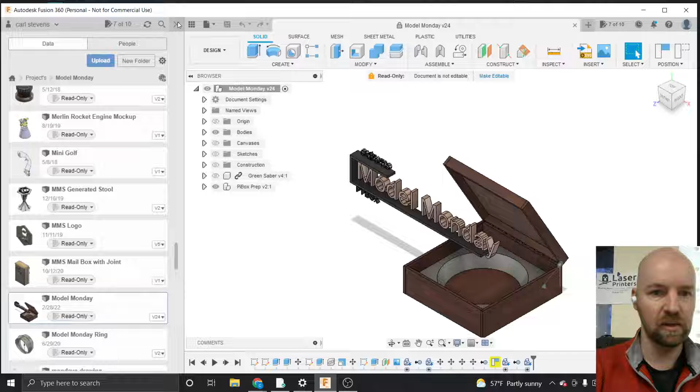All right, so our drawing environment here starts off pretty blank. When we start a blank document, there's not a whole lot to look at. We have our drawing workspace out here in the middle, and up in the top right-hand corner is our navigation cube. As I hover my mouse over that cube, you can see I can click on any object or any face that highlights blue, and we spin around to see that.

If I bring up our file that's actually got something in it, you can see I can hover over this corner, it turns blue, so I can click on that. Then I spin right around so I can see that corner. I can hover over this word 'top,' click on it, and spin around so I'm looking at the top.

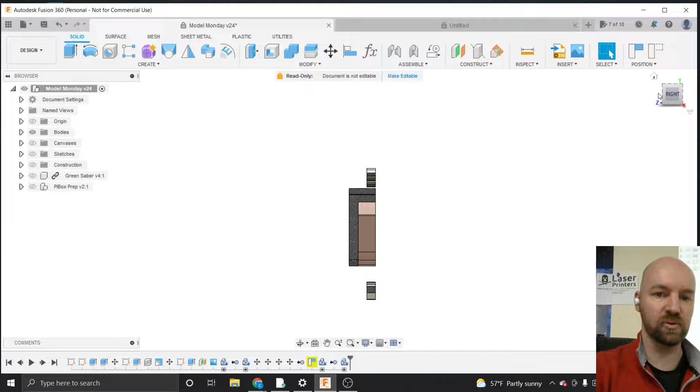If I'm looking at a side of this cube, in addition to these little corner tabs which spin us around so we're looking at the right side, or spin us around so we're looking at the front here now, I also have these rotational views. So I can rotate the view in any way that makes sense for me. I think that, Mike, correct me if I'm wrong, like 75% of getting started in Fusion is learning how to navigate around and getting used to moving around your 3D environment.

Yes. So making sure what part of the menu you're in, because some stuff that works when you're in sketching doesn't work if you click on sheet metal or something else. That's a good tip - remember where you are and what you can do where you are. Everywhere you go, there you are. You just got to remember that. Yeah, so navigating around is one of the first hurdles you got to jump over here.

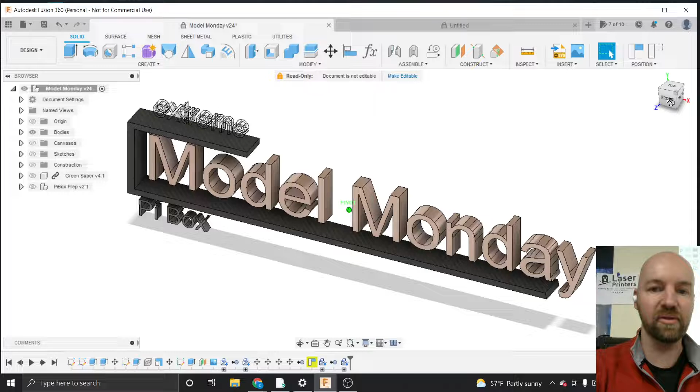In addition to this navigation cube and moving around, I also have a bunch of tools down here at the bottom. The tools down here at the bottom, I don't use a whole lot. That's because this first tool, the orbit tool, I use the navigation cube for that. The orbit tool does the same thing as the navigation cube - it lets me move around my drawing environment here.

Can I ask a question? Yeah. Why is that - that navigation cube, every time I grab it, stuff starts spinning around, and it's not very easy to get the orientation you want. Yeah, so I find if you're dragging your mouse, if you click and drag on this navigation cube, it moves your model around in a more granular way.

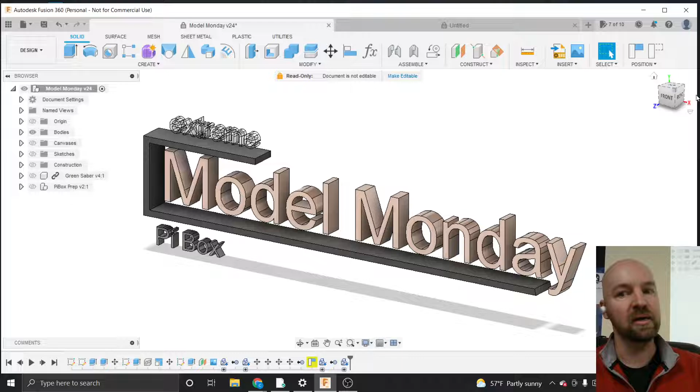That works better when you're clicking and dragging and moving your mouse toward the window. If I move my mouse outside of the Fusion 360 window, that's when weird things start happening.

So what's the difference between those little corners and edges and the front face, side face, all that? The edges and corners, I can click on anything, click and drag on anything, and it'll highlight blue and affect it all the same way. If I click on any blue object on this navigation cube, it shows me different angles of the model.

Down here at the bottom, we've also got a pan tool, and panning lets me just pan left or right, or up and down. Maybe that's kind of self-explanatory, a pan tool.

Any of the tools down here, if you grab hold of them, you have to hit the escape key to put them away. It won't let you click on anything else. If you've got that pan tool active, it won't let you do some things unless you hit escape to put the pan tool away.

There's a zoom in and out down here too. I don't use those a lot because I use the trackpad on my laptop to zoom in and out. I think you can also do this with the scroll wheel on your mouse to zoom in and out.

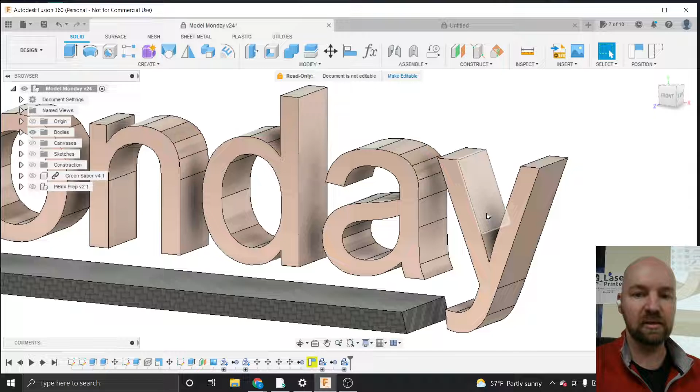A lot of what we'll end up doing when we make things three-dimensional is zoom out, zoom into another area, do some work, zoom out again and rotate our view around, then zoom into another area. Sometimes you'll see my view do that weird spinny thing, and that's just because I moved my mouse somewhere where Fusion loses it. You just have to get your bearings again, figure out where you are, and start from scratch basically.

As we start drawing things and modeling things, a couple things will happen. As we start using the tools up here at the top to create, in general we start by creating two-dimensional sketches, and then we take those two-dimensional sketches and make them three-dimensional.

But when we start making a two-dimensional sketch, we'll have a folder that pops up in our browser. The browser is often on the top or left-hand side of your screen. Right now this blank document just has an origin in it, but once we start making two-dimensional objects, we'll get a sketches folder, and in that folder will be all the two-dimensional sketches that make up this file.

I encourage people to be better at this than I am, and we'll talk about it as we draw. Sketch 1, sketch 2, 3, and 4 are terrible names for sketches, and you shouldn't name your sketches that. These are just the default names Fusion gives you, but you should get in the habit of naming your sketches.

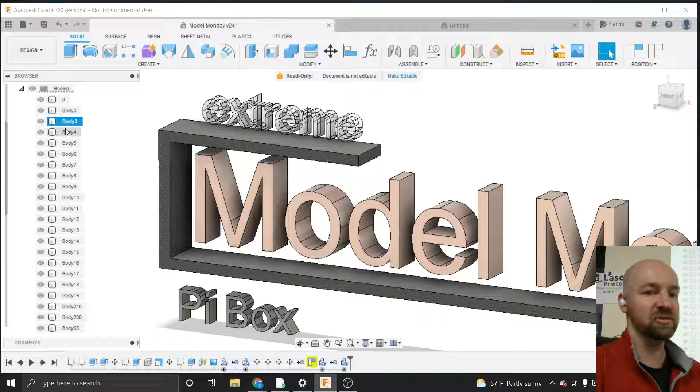As we continue, as we make those two-dimensional sketches into three-dimensional shapes, we'll have a bodies folder pop up, and we'll have all our bodies that we'll once again be diligent about naming. See, I named this one Body 4, and that was a great name because it's the Y—no, it's because I did not name that body. Again, we'll be better at this in practice as we start making real life things.

The last thing I'll point out before we jump in and start making sketches: in addition to the browser populating with folders, sketches, and bodies, our timeline at the bottom of the screen will also fill up with icons. Right now this is just a blank area down here for you guys and girls.

The icons here represent the steps that I took in order to get to where I'm at.

Fusion 360 is a parametric design software. That means at any point you can go back in time using the timeline at the bottom and change something you did in a sketch or an extrusion. Then when you come into the present, it will automatically update, in theory. Sometimes it works better in theory than in practice, but there are ways we can help that work better. So let's get started.

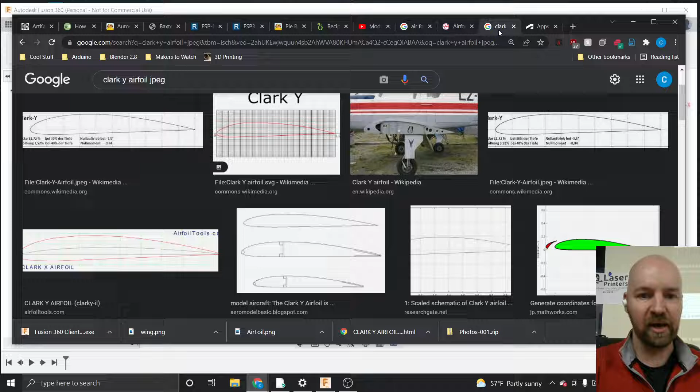In order to sketch an airfoil, there are two ways we can go about sketching in general. The first way is to find a drawing that has some sort of dimensions on it. Now these dimensions are just vague dimensions, and we're going to enter in dimensions in their absence - or to measure a thing you have in front of you and make your sketch from those dimensions. So what do I mean by that? Let's make a sketch.

From the Create menu here, we're going to go ahead and choose the Create Sketch option - it's the second option from the top there. If we choose this Create Sketch option, it first wants us to pick a drawing surface to draw on.

Go ahead. What units are you working in, and what's your home view?

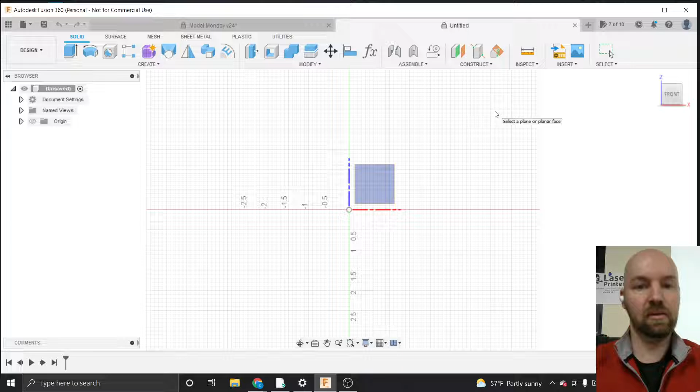That is a fine question. In this class in general, I tend to draw in freedom units - otherwise known as inches, or the imperial system. So if your head works in the metric system, I believe that international standards exist, but I will not acknowledge them during the hours between 6 and 8.

So if you want to change your units, you just have to spin down your document settings window here, or the little triangle. Then if I hover over units, this little icon appears next to it. I can click on that icon, and then you can change it to freedom units, which I have here. That's my default - I have this little checkbox checked. So if you want to set that as your default, you can feel free to do that as well.

Otherwise, like I said, I know that there's something called the metric system that everybody else uses, and they think they're so cool because they do the same measurement as the rest of the world. But this is America, Jack.

If your home view is Z-axis up - it is, and honestly I don't change that too much. I don't find myself clicking on this home icon very often. If I right click on it, I think I can say 'go home.' But the precise orientation of this cube doesn't really matter a whole lot. When you talk about machining stuff, then your orientation matters a lot, but that's a whole different coordinate system that you set up yourself.

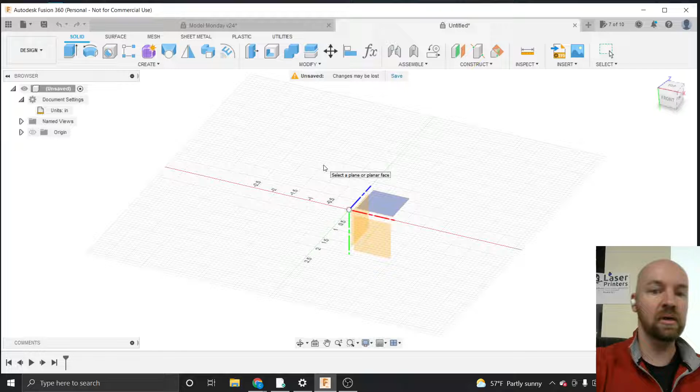Fusion gives us these drawing surfaces right off the bat to start with. You can imagine these as being walls and a ceiling or a floor. I can pick any one of these drawing surfaces to draw on—it doesn't really matter a whole lot. I tend to pick the front surface as a rule of thumb. For me, that's the surface between the X and Y axis, the red and green axis. But again, it doesn't matter much which drawing surface you choose to start with.

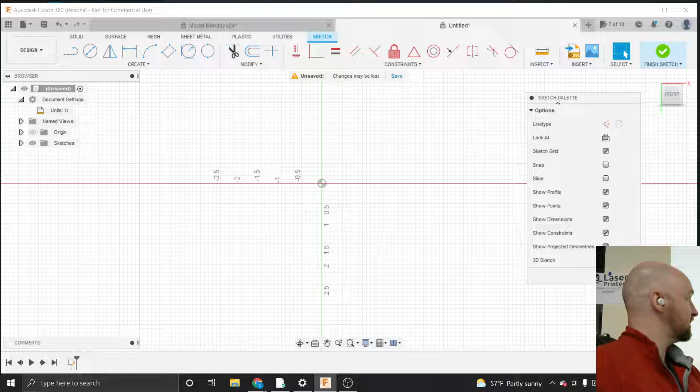Once I click and place that icon, a bunch of things change here. Because we're creating a sketch, we're what's known as editing a sketch, and there are a couple of flags that show you're editing a sketch. We've got our sketch palette window here, and all of our tools across the top have changed. Where previously we had three-dimensional tools, we now have two-dimensional sketching tools for creating a sketch. We've also got our finish sketch icon in the top right-hand corner. So now we can start using some of the sketch tools.

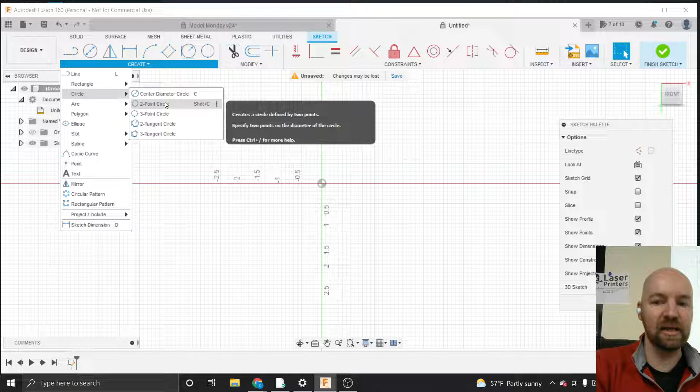From the create menu, let's grab the 2-point circle option—go down to circle, then 2-point circle. One thing I like about Fusion, and what makes it beginner friendly, is that it gives you tool tips for almost everything. If I'm ever curious or don't know what to do, I can just stop moving my mouse and Fusion will tell me. A lot of these tool tips show pictures and tell you not only what the tool does, but how to use it. This one creates a circle defined by 2 points, and tells me the way to use it is to specify 2 points on the diameter of the circle.

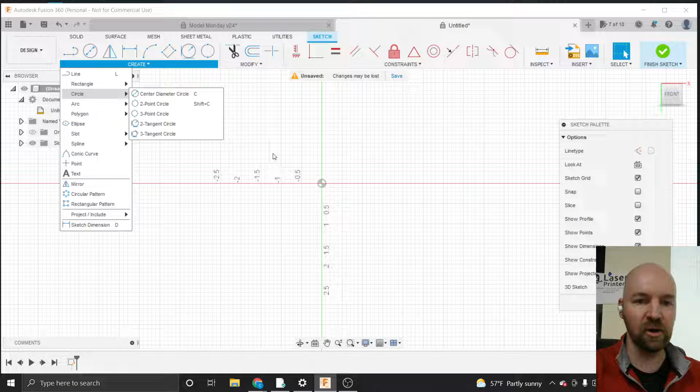If I click to choose the 2-point circle option and then stop moving my mouse, Fusion pops up with a little tooltip—like Clippy from the old days of Microsoft, the little paper clip. It tells me to place the first point on the diameter. So if I click right here at the origin, at the middle of my drawing plane, I'll place that right there. Now it's not a click and drag, it's a click and move—I've clicked, and now I'm just going to move my mouse out, and I could click to place the next point of this circle.

Whenever I encourage people, the rule of thumb is: when you see numbers, let go of your mouse and embrace those numbers. It's Pi Day, so we're embracing numbers of all kinds today. Let's just make this a 1-inch circle. I was going to say we should make it 3.14 inches, but that wouldn't be a very good idea for this particular sketch—and it's a circle, so it's already pi, right? We don't need to add pi to the number here, it's already pi.

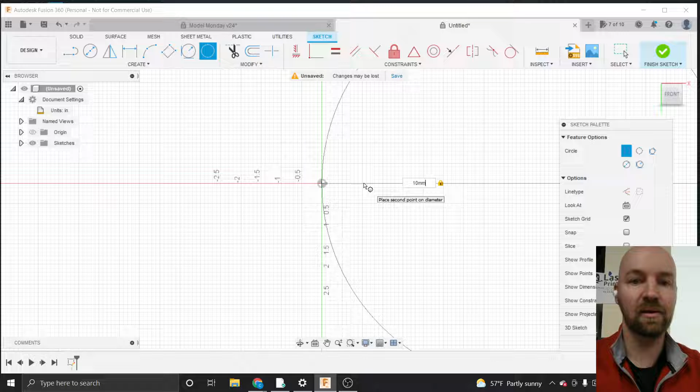If I just make that 10 millimeters—even though our units right now are inches, 1 inch is about 2.54 centimeters, so you can just type in another unit there if you feel like it and draw with whatever units you want, even though our units are set to inches. I'm just going to stick with 1, and then place the second point of my circle. Actually, when I type in a distance of 1 inch, I can just hit enter. Now I've got a nice 1-inch diameter circle.

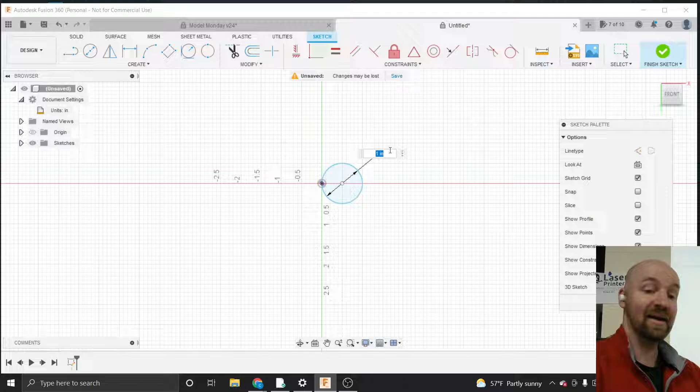If I wanted to, I could move that measurement around—sometimes you'll have to move these measurements so they're more visible, but outside the circle is going to be fine. The other thing is, if I wanted to, I could double click and change this measurement—I could double click and change it to 2 if I wanted to. I don't need to, because 1 inch is just fine, but just know you can change those measurements by double clicking on them and then change it to whatever you want.

Let's make another part of the sketch. I'd like to make a line that goes from this circle backwards, and I'd like to make that line tangent to this circle. So how will we do that?

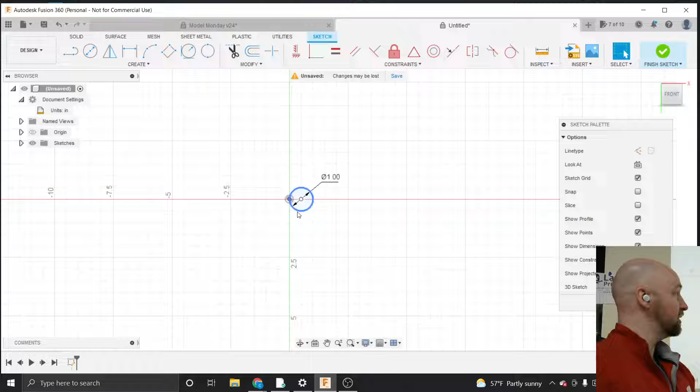Let's go ahead and find the line tool first. If I click on the Create menu, the very top option is Line. Now if I stop moving my mouse, it'll tell me I'm supposed to place the first point in my line. I'm going to zoom in here so this circle is a little bit bigger.

I'm purposefully going to place this line not tangent to this circle because I'm going to make it tangent later, and I suppose I could show you how to do it both ways. So I'm going to take this line and draw it out. Six inches seems like a good distance to me. And I'm going to hit enter here.

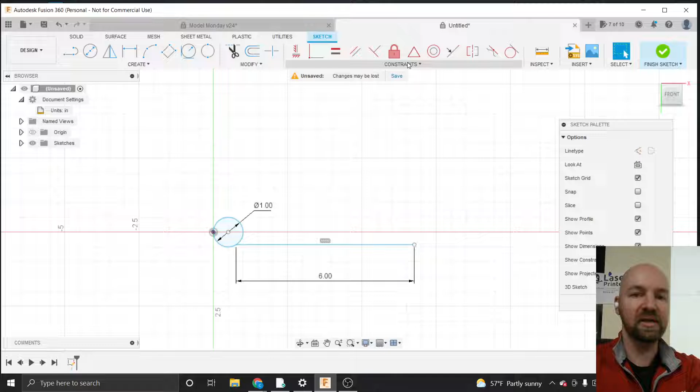Now my line is definitely not tangent to my circle, but we've got a whole menu dedicated to constraints. These constraints are ways to force your sketch into certain rules. You can apply rules after the fact, let's say. So for example, there is a constraint called the tangent constraint.

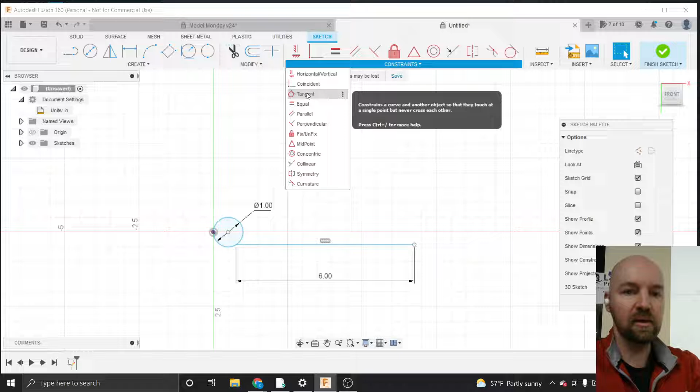If I choose this tangent constraint option here, and I pick the circle that I want something to be tangent to, and then click on the line, it's going to go ahead and make that tangent for me. So it's going to add this tangent constraint right here. That little icon is my tangent constraint icon, and now those things are always going to be tangent to each other.

Let's make another kind of line here. So from the Create menu, go ahead. Mine jumped up off the axis. Is there a way to move it back down?

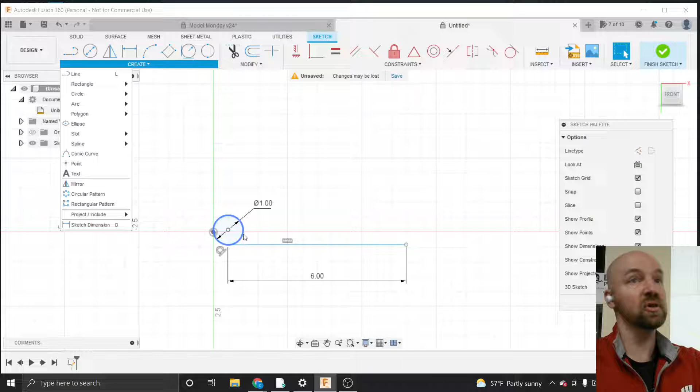There is. Right now our sketch is not fully constrained, so things can move around a little bit, and if we wanted to we could fix that. I think we can fully constrain this sketch as is. So the sketch is constrained in dimension right now, but it's not really constrained in space, so it can move around in space a little bit here.

I bet if we add a line, so if we click on the Create menu and we add a line that goes from the center of the circle here to our origin, at whatever angle that's at will be fine.

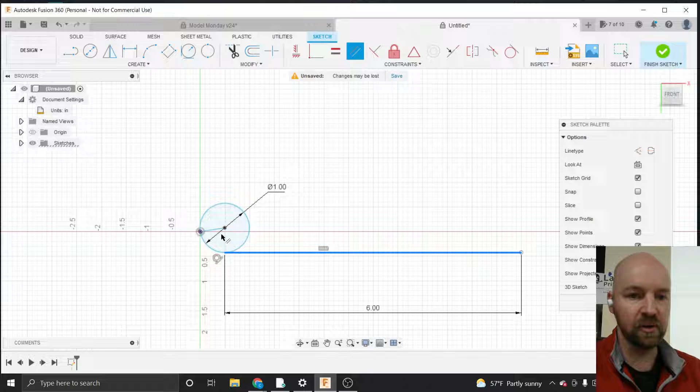And now if I add to this line a constraint that forces it to be either horizontal or vertical, or the other option would be to do a parallel constraint, I bet that would work as well if we choose this parallel constraint. I'm going to pick on this line that I made down here, and I choose that line there. There we go. Now all of our lines turn black, which means our sketch is fully constrained.

So now if we add more constraints here, which we're going to do, everything is kind of locked in position. It's not going to shift around in X or Y.

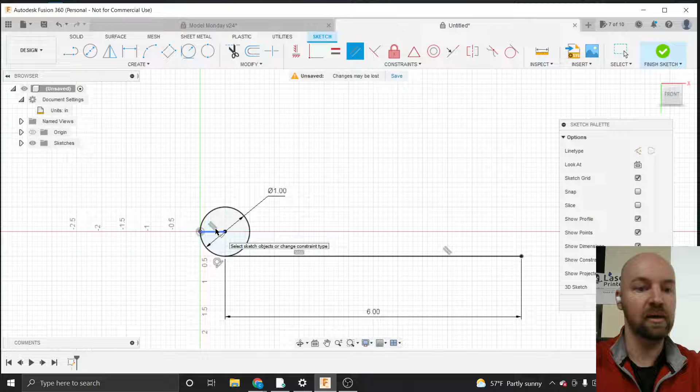The other constraint that I think would work in this case, if I make it wrong again here, is this horizontal vertical constraint. So if I choose this horizontal vertical constraint and I choose this line... I had something selected there. So horizontal, vertical, and I choose this line here. Yeah, so now this line will always only be horizontal.

So again, it's constrained in space from that circle being able to rotate around that point, if that makes sense. Does that make sense? Yes. You guys see why that constrained it? Kinda. Does that make sense online? Okay, cool, yeah, go ahead.

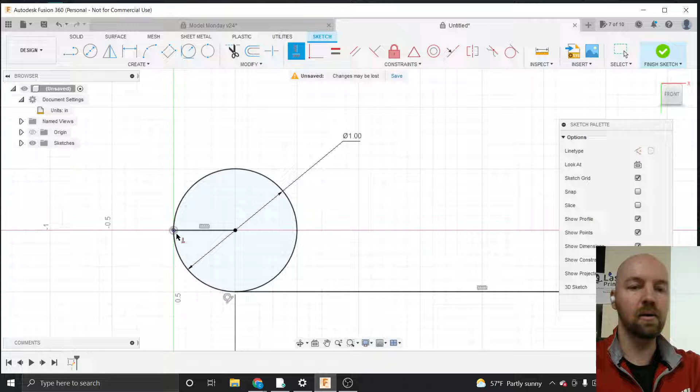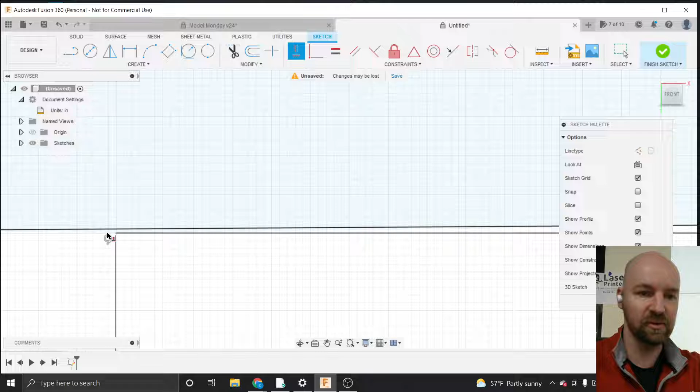Well, when you zoom in a lot between the tangent point and the circle... yes. Yeah, it's just they're definitely... I think they're definitely connected. It's just for some reason we're looking at it at such a small scale that I don't know. That's a weird thing, but they're definitely connected because it can't be tangent to it if it's not connected.

All right, cool. So we are going to make the last part of our wing here. If I click on the Create menu, let's go ahead and choose this spline option. A spline is a weird kind of curve, a way to make a curve that is made up of more than one radius.

So somebody here, that may be a useful fact for you. So if we choose this fit point spline option, again, Fusion is going to tell us exactly what to do.

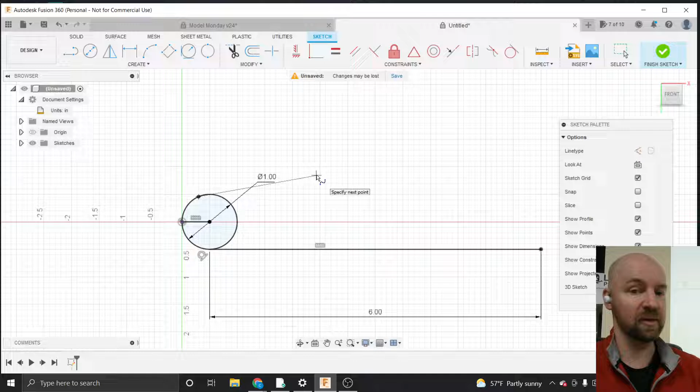Here we have to specify the first point. I'm going to click, and I want my first point to be on this circle here. So if I click on that circle and move my mouse out, I'm going to move over about a third of the way down this wing we're making, and click to place the next point. This isn't an exact science because we're going to change this later. The third point of this spline is going to be where I click on the end point of that line down there.

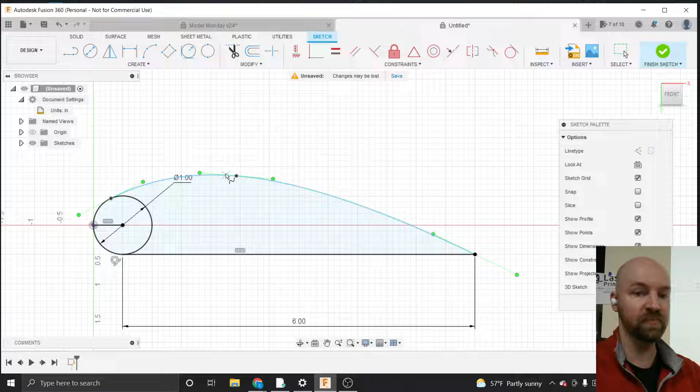So you can see I've got two radiuses that I've made, the radiuses between points, and then I have to click on the little checkbox. That's important - the checkbox that appears at the end. I could keep moving this and continue clicking a whole bunch more times, but here I've got a kind of complex curve. If I click on this checkbox, it finishes the spline for me. The two radiuses I've made are between this point and this point, that's the radius of one circle, and then the radius between this point and this point is another circle, and they're just tangent already for you. That's kind of what this spline tool does.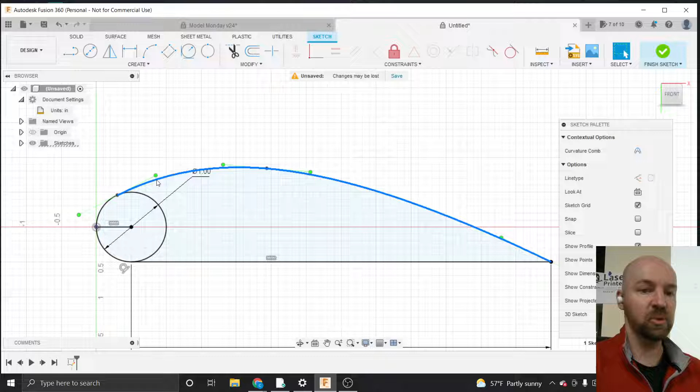The last thing we want to do on this sketch is make this spline tangent to this circle. We can do that with the same tangent constraint we used previously. So I'll click on constraints, choose the tangent constraint option, and then click on the two circles - I'll click on that circle, and then click on our spline. And if I did it right... oh well, actually it doesn't. Maybe a spline cannot be fully constrained.

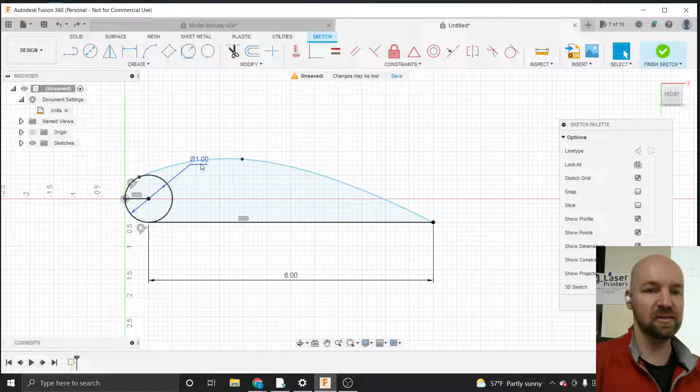I wonder if there's a way to fully constrain a spline. That's a good question. So the other end of the spline is always connected to... what if I specify a distance here? Oh boy, let's go ahead and undo that. Maybe it's because this point isn't locked in space. It's probably not that big of a deal - if you grab that and move it up and down, it's going to change, so it's not constrained here. I'm kind of curious if we can fully constrain a spline though. If I dimension this line to be 1.35... nope. Yeah, a spline, we may not be able to fully constrain, but that's okay. We can move on. We talked about constraints - that's the key point I wanted to get across, that you can constrain things. So that's one way to make a sketch, using measurements.

Mike, did you have a question? I'm just going to say another way of getting the airfoil is using the ellipse function in rectangles. Oh, I see. So as an example, put like a quarter inch by 2-inch rectangle.

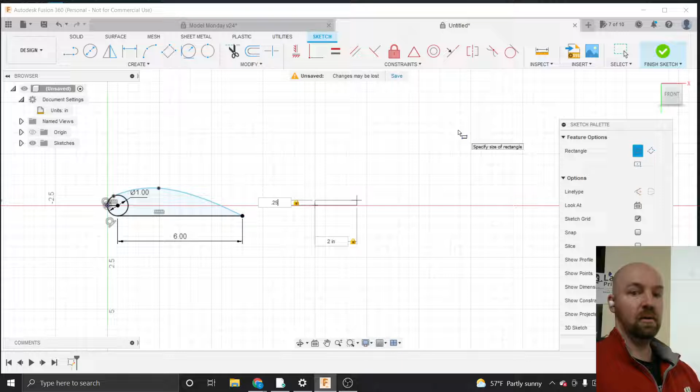So if I go to rectangle and make myself a 2-point rectangle, and you say quarter inch by 2 inches, the long way. Like that? Yes. So if we make ourselves a rectangle like this - you mind if I? Not at all. Okay, and make a quarter inch by an eighth inch rectangle - quarter long, eighth inch high. All right, 125, 125.

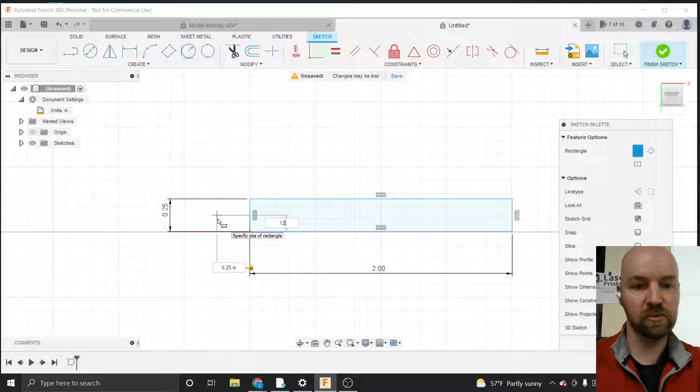Okay, now jump on your ellipse tool. The ellipse tool might be new for some of you, but good news, Fusion has tool tips - it'll tell you how to do it. Okay, I think it wants the center point first. Let's see, place center, click point there. Yeah, and click there at the end of your line. Uh-huh. Now okay, click right there. Uh-huh. Okay, that's your leading edge.

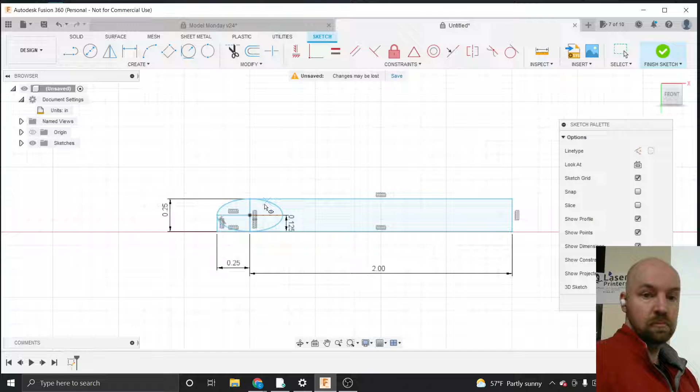Now for the second half of the airfoil, open ellipse again. Okay, click in the center. Down here? No, down here, here. All right, click there, and click at the end. There. And now our click height is going to be there. Oh, look at that now.

Finish the sketch. And you select these two segments, this segment, extrude it out, and that's a working airfoil. So this plus this plus this plus, not that, plus this - yep, that's an airfoil right there. That's a working airfoil - that's what I use in my boomerangs. Right on.

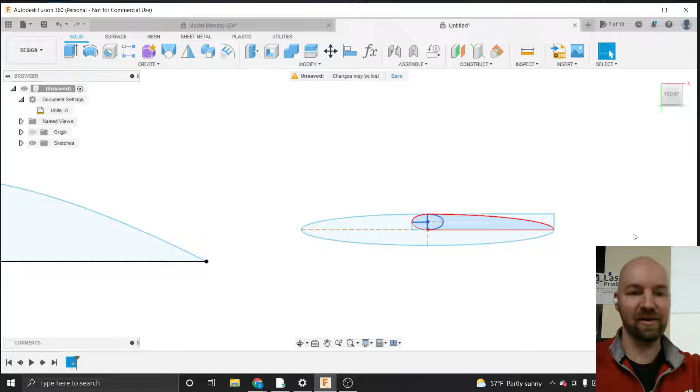So, yeah, come back, you're recording this one. Yep, definitely. Yeah, I'm sorry. No, yeah.

Mike, it's ironic, you always tell me to slow down, and you just drew an airfoil in like 30 seconds. It took me a half hour to get here. Yeah, but you don't know how many hours it took me. I would. So that's awesome.

So that's one way of making sketches: grab some measurements, pull up some individual sketch tools to create a sketch, and then draw your sketch with measurements that you grab from the real world.

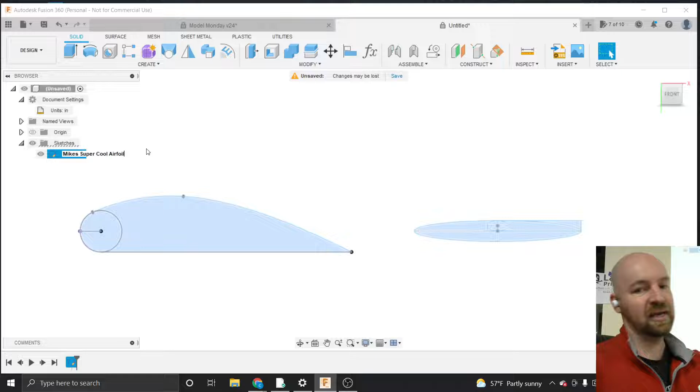So the other way, let's point out, I've got a sketches folder here, and I've got a sketch inside of that. It's called Sketch One, and like I said, it's a good habit to get into naming these sketches. This is Mike's super cool airfoil. You guys can't name it that because you don't have Mike's super cool airfoil on your sketch. You'll have to call yours like Carl's kind of lame airfoil. But you can name it whatever you want to.

So the other way to make a sketch here is to do it from a picture. I had kind of planned to do this before you came in and asked about this, and the way to do it from a picture is first to have a picture. So if I go out to the internet and look up this airfoil that I've found in a lot of gliders, this is the kind of project I want to do, a glider project.

So if you Google the Clark Y airfoil, you guys can do this here live too. We'll download a picture that we find from the internet, and I'll give you a second to Google that. A key note here is you got to find a JPEG file. PNG files are all over the internet, and Fusion won't look at them, so it's got to not be a PNG file.

So if we find a Clark Y airfoil here, like for example, this one looks good, I'm just going to click Save Image As. This is my airfoil. I'm just going to save that onto my computer here.

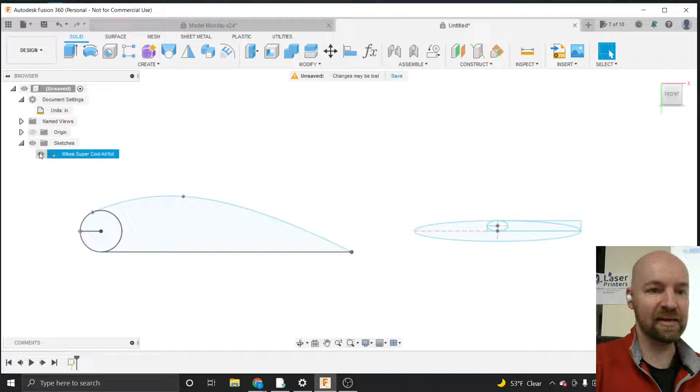And now I'm going to hide this sketch, insert that photo, then scale it to the right size, and then draw on top of it.

So if I go ahead and click on this insert option from the insert menu and choose canvas, now this window here will pop up, and I'm going to choose to insert the canvas from my computer. I have to navigate to the place I saved it, which I thought was my desktop, but apparently is not. Save image as, desktop, save. Let's try this again. There it is, so there is the image that I just saved, and I'm going to say open.

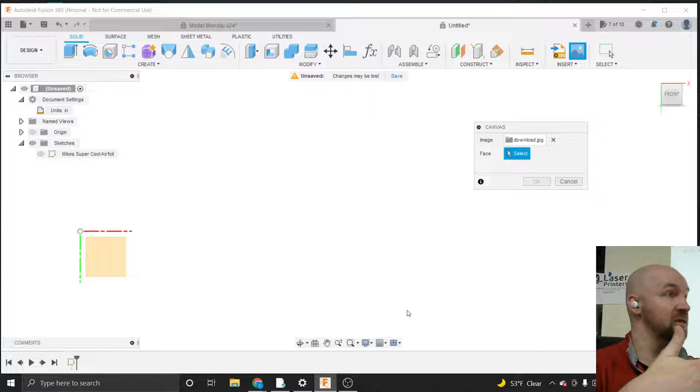Now, kind of like creating a sketch, we've got this two-dimensional canvas, and we need to choose a surface, a plane, to put that on. I'm going to pick one of these planes that Fusion gives us right off the bat, and I'll choose that as an option. Now I've got some options for scaling this picture up, and I'm not going to worry too much about these because we're going to be more precise about this in a little bit. I'm just going to use this corner to scale it up so I can see it. I just need this thing to be clearly visible on the screen. If you've got it so small that you can't see it, you're not going to be able to scale it later.

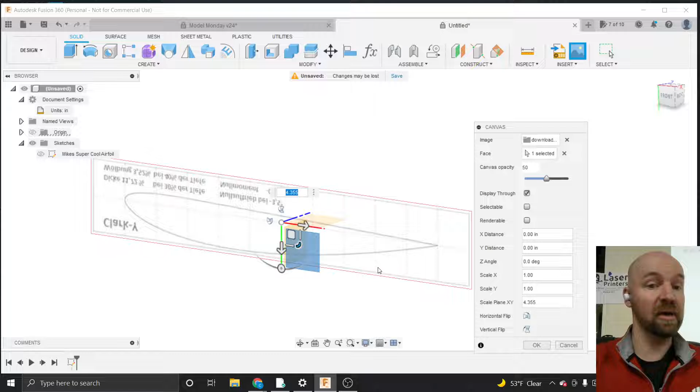I was trying to download the file, did you just open the window or something like that? Start a new drawing? Oh, I did not. I'm just making this on the same file. I just went to my insert menu and said canvas. I'm going to insert a canvas here, and now I'm going to choose to insert the canvas from my computer.

And then you'll navigate to wherever you saved that image. The image is in the computer, you just got to get a saw, and then you cut it open, and then you find the image there. I'm pretty sure that's how that works. It's always funny when people say something is in there, it's like it's really not in there, it's more like it's on there, I guess. But language is imprecise, or English is imprecise, or my use of English is imprecise.

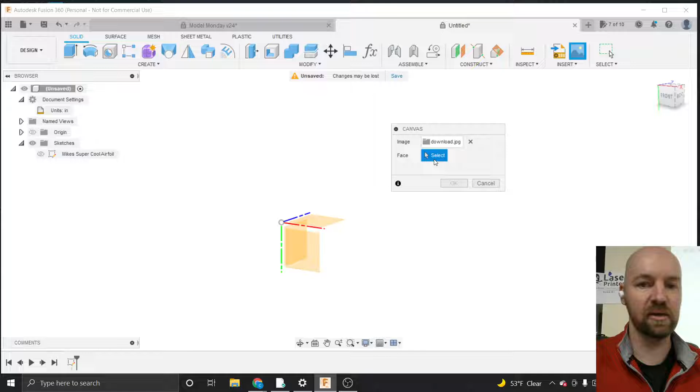All right, and then we're going to place that just on one of these three drawing surfaces. So it says here in this canvas window, hey, select a thing. Oh, all right, I can do that.

And then we've got our little widget here that we can use to move it. I can move it in some direction. If I need to put this canvas somewhere specific, I can move it up or down. I can rotate it around if I want to.

But the thing that we really care about is getting it to be the right scale. So we just need to scale it up right now to a size that we can see. And I'm going to go ahead and say, okay. And now we've got an airfoil. The airfoil is upside down, but I'm not really concerned about that right now. Like I said, the thing that I really want to do is to make it the right size.

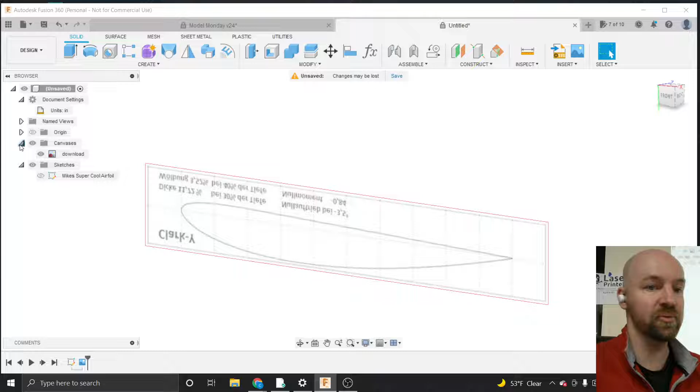So if you've got a picture of your object, you want to be able to scale that picture here in Fusion so it's a precise size, right? So if we spin down this canvases folder, we've now got a canvas here. The canvas is just named the name of the file, but I'm going to go ahead and change that to be our airfoil canvas.

And if I right click on that, I can find that I have this calibrate option here. So now I've got my cursor, and I can, if I start moving my mouse, it's going to say click to place the first point on the canvas. What it wants me to do here is to give it a measurement between 2 points.

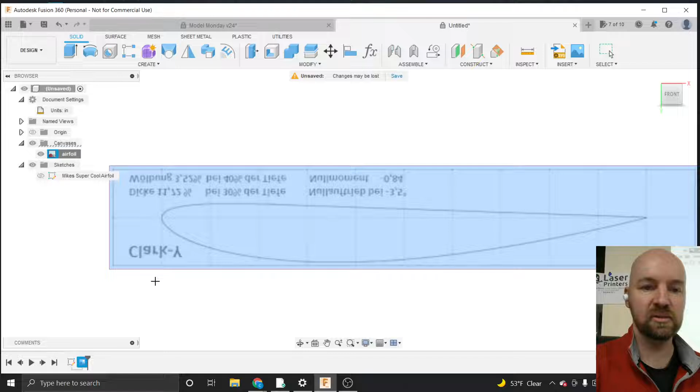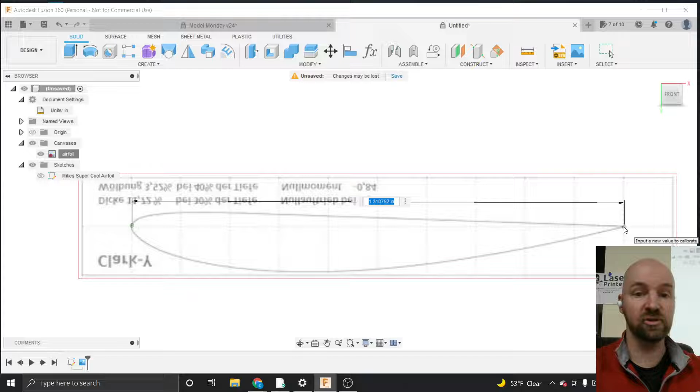So if I have this airfoil, say in the real world, or I know how big I want this airfoil to be, I can click at the leading edge of my airfoil, and then I can click at the trailing edge of my airfoil, or between 2 points that you know the measurement of on your sketch or on your picture. And now you can measure that and go, oh, my airfoil is 4 inches.

So if I type 4 there and click enter, it's going to scale that up to be a fairly accurate representation of your image. I don't know if I'd use this for a press fit, but you can get pretty close.

And now I have an image that I can sketch over the top of. So I've got this canvas. I don't need to try to measure this curve in some way, shape, or form, or measure the leading edge radius. Like I don't need. This is great for things with curves.

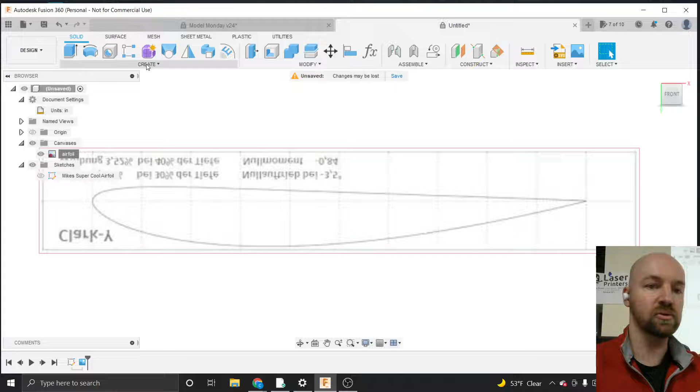So now all I have to do is create a new sketch. So I'll click on Create, and I'll come down to Create Sketch. Now I'll specify as the plane I'm creating this sketch on is going to be the same plane that I placed the canvas on. So I'll click, and now I'm creating my sketch again, right?

So I've got my sketch palette here, and I've got all my sketching tools up here at the top. Now we learned when we were making the first sketch that a great way to make a complicated curved shape is with the spline tool.

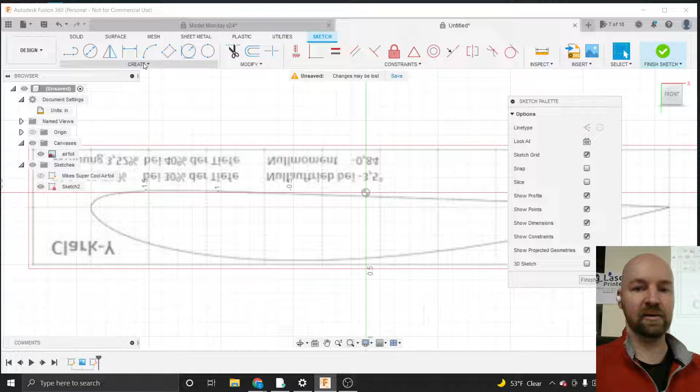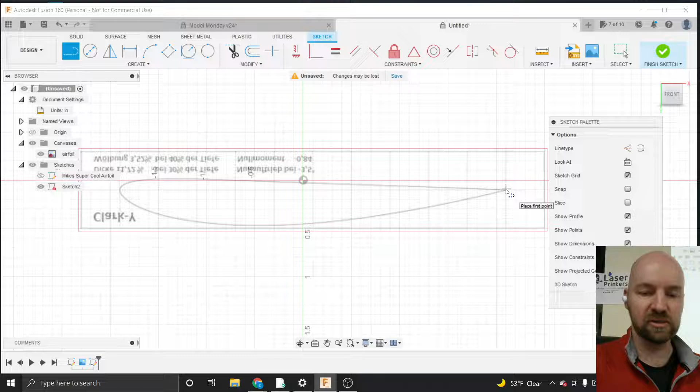So actually, let's start with a line, because I'm pretty sure that part of this airfoil is a straight line. I just don't know how much of this airfoil is a straight line. So if I choose the Create from the Create menu, if I choose the line option, now I can zoom in and kind of start on the trailing edge of my upside down airfoil here.

And this is where it starts to get maybe a little less precise, is like how thick is that line that has been drawn by my canvas. But I can kind of pretty easily see where this line starts to diverge from being straight is probably somewhere right around here.

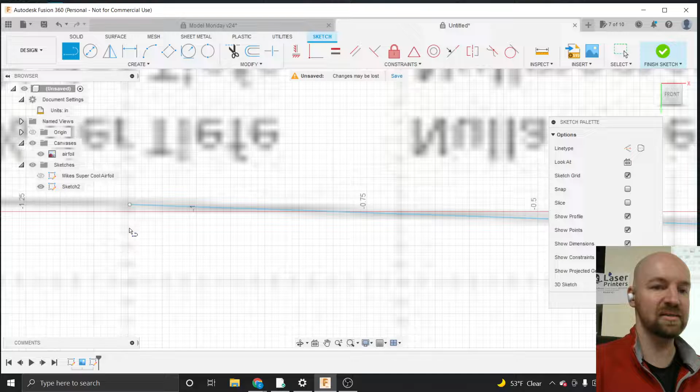So if I click and place the endpoint of that line, and then I can click on this little green checkbox. So this checkbox pops up whenever you want to complete a line or a spline. And now I can kind of continue the rest of this just by tracing over it. So I think the rest of this is going to be curves.

So from the Create menu, I can grab that spline tool that we used, and I can choose this Fit Point Spline option. This, I think, is the easiest spline to use. I don't need to be super precise about this because I can move these points around later.

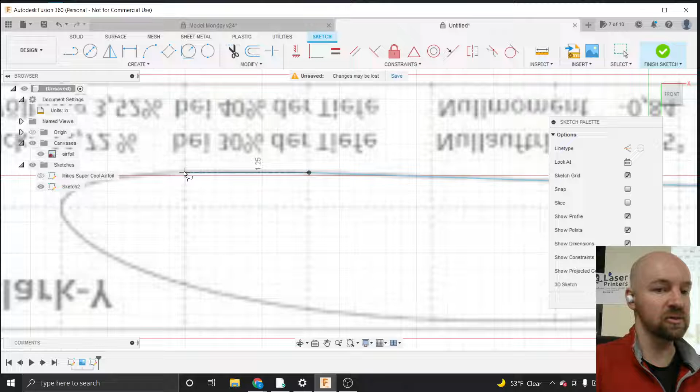So I can click, and as long as each one of my clicks happens on the line, it will probably be pretty close. So I'm going to keep placing points. And when I'm using this spline tool and tracing this out, I kind of see how far I can go before the spline starts diverging from the canvas I'm trying to trace.

So here I can see this line is still following it pretty good. If I move my mouse out a little bit, the line is still following okay. Once I get out here, we start diverging a little bit. You can see it's kind of diverging a little bit. So that tells me that this curve is closer in here.

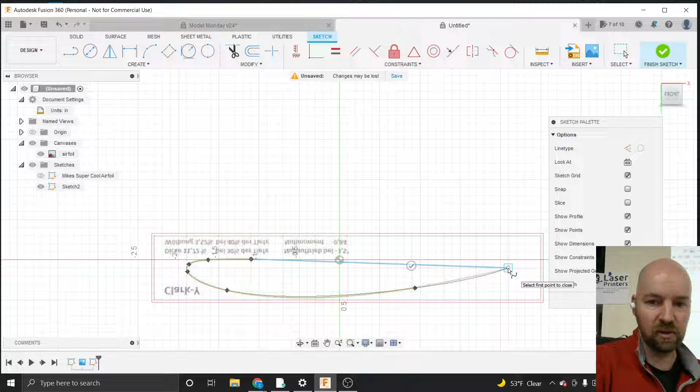I'm going to keep going here. If I move my mouse out, this might just be all one... oh, not quite, so somewhere around there is another curve. And then I bet the rest of this is all one. To finish my spline, I just click on that little checkbox there.

Now a spline can be tweaked. We've got all these control points here, these little arms you could say. I'm going to hit the escape key. Right now I still have the spline tool in my hand, so if I click, it's going to want to make another spline, and that's not what I want to do. So if I hit escape, I'll put that spline tool away.

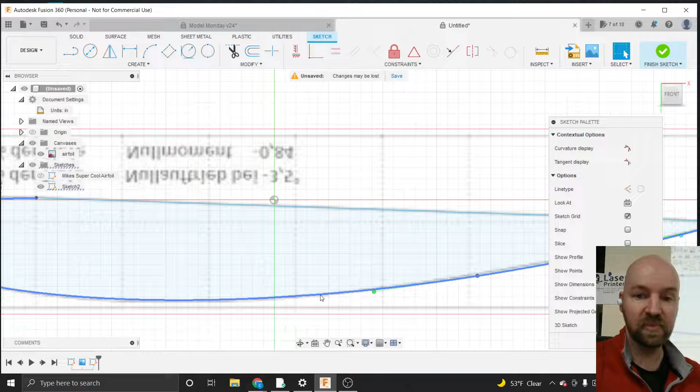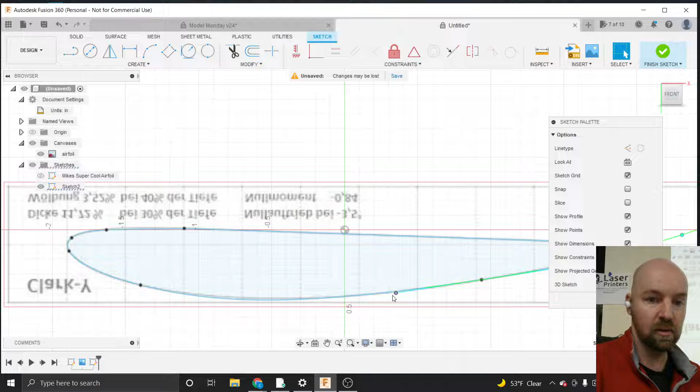Now all of these curves can be tweaked. I can extend these control points out, bring them in, and push and pull to do whatever it takes for my spline to more carefully, or more precisely, fit the sketch underneath it, the canvas underneath it, I should say. Sometimes you'll have to zoom in, but that looks pretty good. Looks good enough for government work.

Once you have that, could you extrude that then if you wanted to? Let's do that right now. The last thing we'll do here before we finish class is—we spent all this time making two-dimensional shapes. I'm going to name this sketch, because we all know I love naming sketches. It's my, actually, this is the Clark-Y Airfoil.

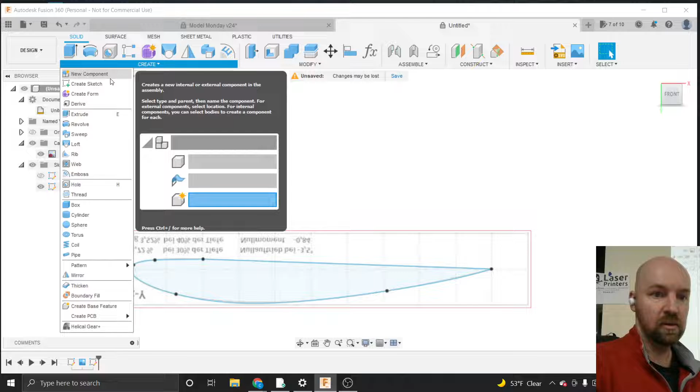So once you've got a fully enclosed shape—and fully enclosed means encased on all sides—like, for example, if I make a quick sketch and my sketch looks like this, and I say finish sketch, now this shape is not fully enclosed, so I could not extrude this shape because it is not connected here. But this shape is fully enclosed.

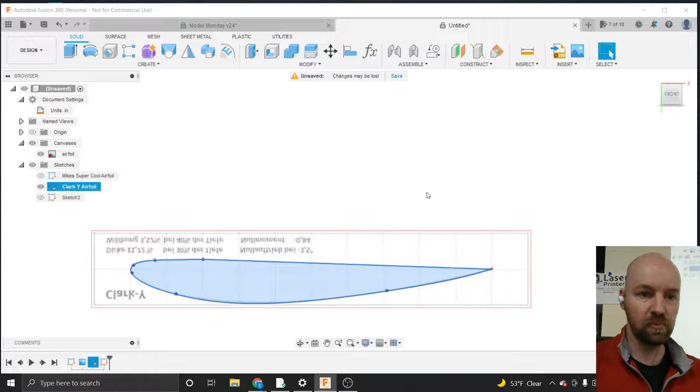And we'll turn on Mike's super cool airfoil as well, and I could extrude out any of these enclosed shapes, right? So I'll turn that off for now. From the create menu, if I go ahead and choose this extrude option, and I choose that shape that we made here that I traced, I can specify a distance of like 1/8 of an inch. This is a scale model, remember, that I'm making.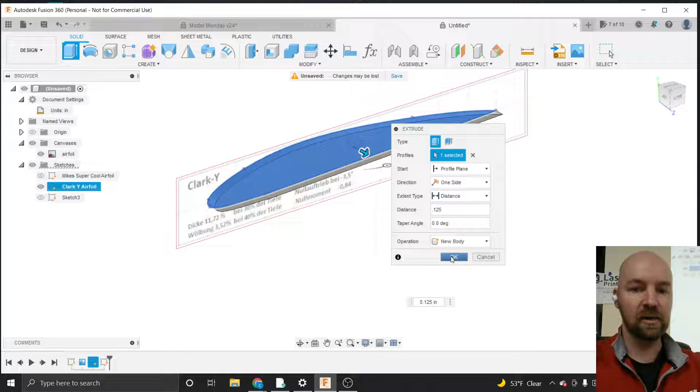An airfoil is just the individual part of the wing that your fabric or whatever covering material gets wrapped around, right? You got a bunch of these. So I'm just going to make this 1/8 of an inch right now because it's a scale model. And I'll say OK—now we've got a three-dimensional shape here that we've made.

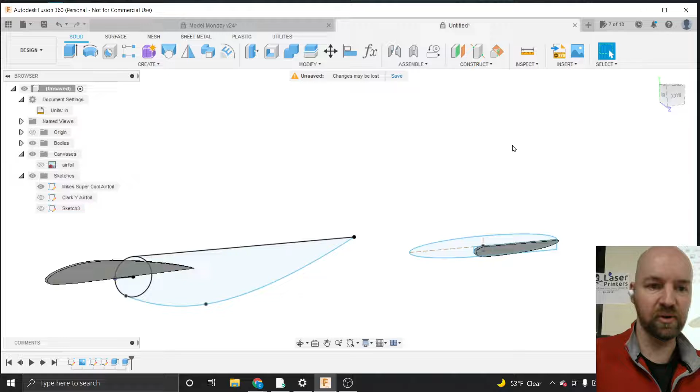You know what, I want to extrude Mike's airfoil too because this is a cool shape too. So if I grab my extrude tool again, here we've got an airfoil that's divided by some lines, so we've got to choose more than one of these enclosed shapes. And again, 1/8 of an inch. So there we go, we got a couple of airfoils that we drew for the sake of making them appear together. I'm going to use the move tool and turn off my sketches. There we go, we got a couple of airfoil shapes.

More importantly, we did some sketching. We learned how to maybe a little bit better use those two-dimensional sketching tools. And keep coming to class, I encourage you to come. I know people learn a little bit more every time—they may not be all new knowledge every time you come, but there's bound to be one or two little tidbits that you pick up.

So next time I think I want to continue this little model airplane project, and I think we'll extend out this airfoil and make it into a wing shape. So we'll have a wing, and we'll use the pattern tool—that'll be a fun tool to use. We might make a surface. That might be fun. But yeah, wing shape or like airplane model shape in a couple weeks.

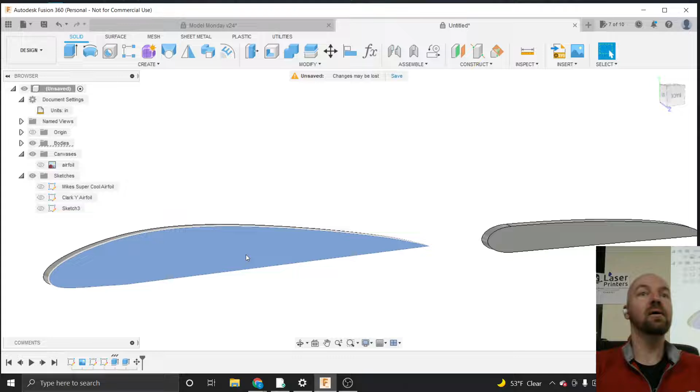Any questions before we finish up? Yeah, that's where you grab the extrude tool. Ah, perfect—so when you're no longer editing a sketch, this is what Mike pointed out at the beginning, is like knowing when you're editing a sketch. If I click on the create menu, I can choose this extrude option. Now, if you don't see extrude in the create menu, perfect, that is it—so right now you are editing a sketch.

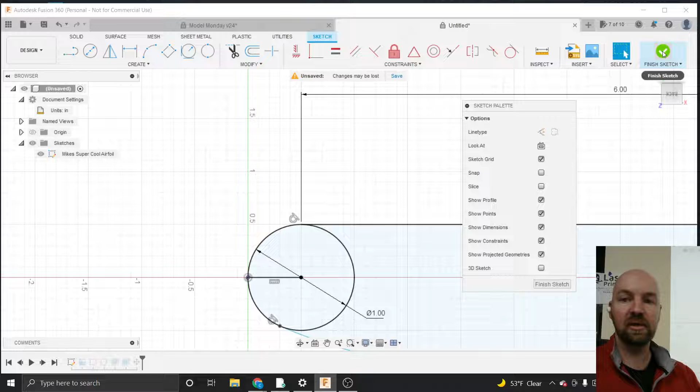So in order to finish that sketch, there's a couple ways to do that. You can either click on the finish sketch button here in your sketch palette, or in the top right hand corner of the screen, there's this little green checkbox, and we can click finish sketch there. Both of them will do the same thing. And now we get back to that area where we can extrude out a shape.

So if I choose create and then extrude, we can choose the shape that we're going to extrude. In our case, it's this guy right here, or if you made the ellipse wing. Then you have to specify a distance in the extrude dialog box. I went with 1/8 of an inch because in freedom units, 0.125 is a round number—go figure that out. I'm just going to say OK there, and there we go.

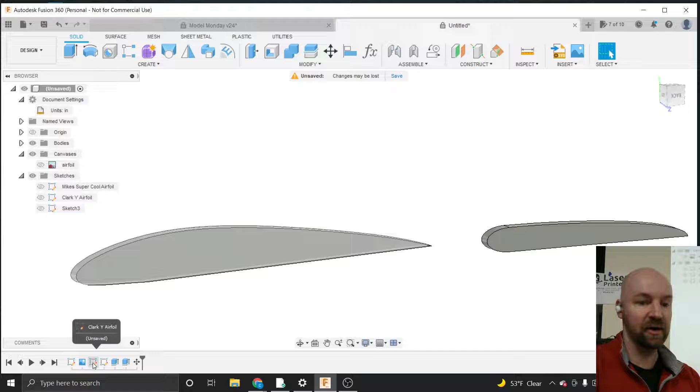At the beginning, I mentioned that Fusion was a parametric design software, right? As you saw, as we started making these, we've got a bunch of icons down at the bottom that have appeared. Now, for example, this first extrude I did, if I right click on this I can say edit feature, and now I go back in time because I made a couple of extrudes here. I go back in time to when I was making that extrude and I could change something about it.

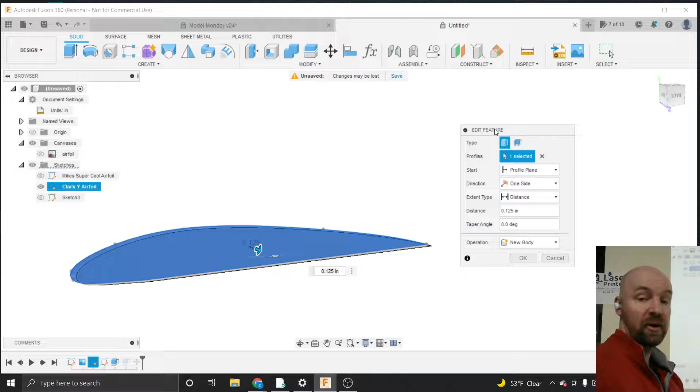The same way with this sketch, this very first sketch I made—if I right click on this feature down in my timeline and choose edit sketch, now I go back in time to when I was making this sketch and I could change this wing. Let's make it exaggerated so it looks completely different. I can make it 12 inches and say finish sketch.

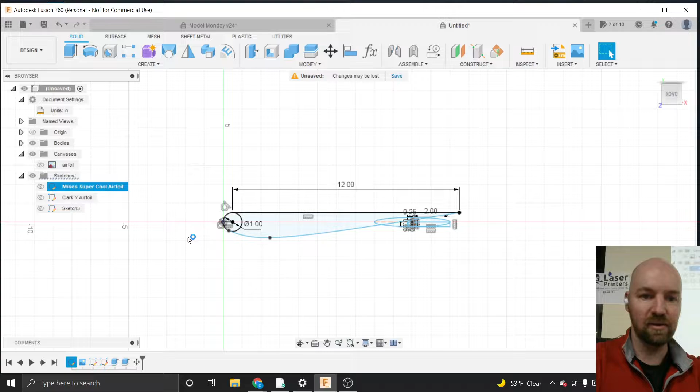Oh, that's interesting. How come it didn't make it? Did I not save it right? This is why I say sometimes it works. That's my Clark Y Airfoil. Oh, it's because I didn't actually extrude that sketch. The only sketch that I extruded was the one I traced, and Mike's sketch. So if we go back here and change, then we'll make that 6 again—we've got to change something about a sketch that I actually extruded.

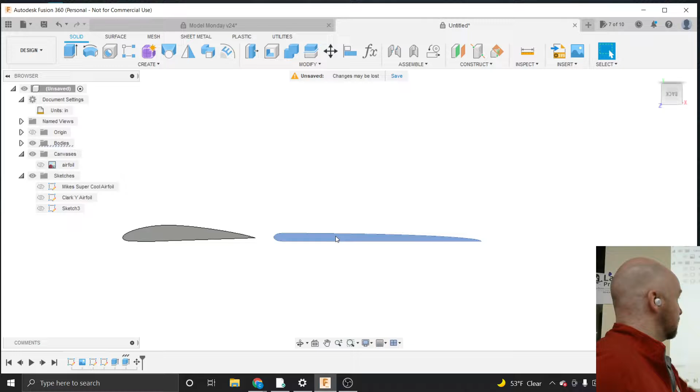So let's make this wildly different. Make that 6 inches and say finish sketch. Now when we come back into the present, you can see that dimension is updated in the extrusion that we did.

It's not always safe to go way back to the first sketch you made and make a change—sometimes unpredictable things will happen. So I certainly encourage people to draw things right the first time, but some changes are possible.

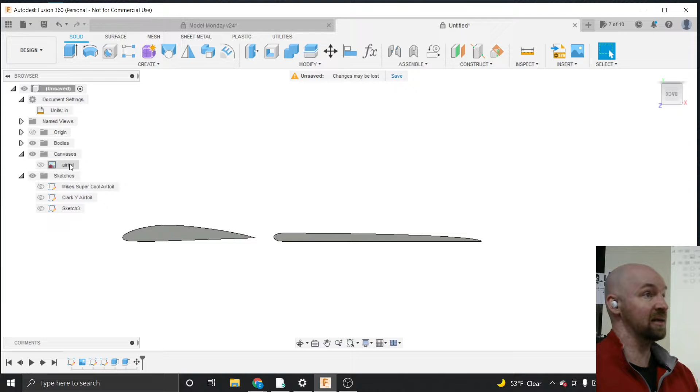Can you delete an old sketch from there? You can delete sketches, however I would discourage deletion. So if you absolutely need to get rid of something, I would certainly choose to hide a sketch before I remove it. I would almost never delete a sketch—I would almost never delete anything. The preferred method, I don't even think it gives you an option for removing a sketch, but there is an option. Oh yeah, if you suppress it, I don't know if it gets rid of all the features in the timeline that may have come from it. But like a body, for example, instead of deleting a body, I would always choose this remove option.

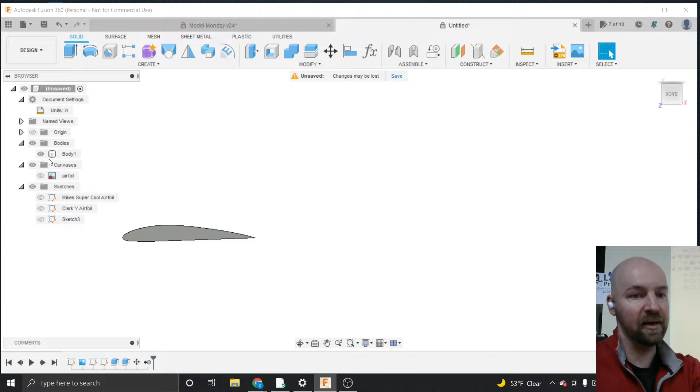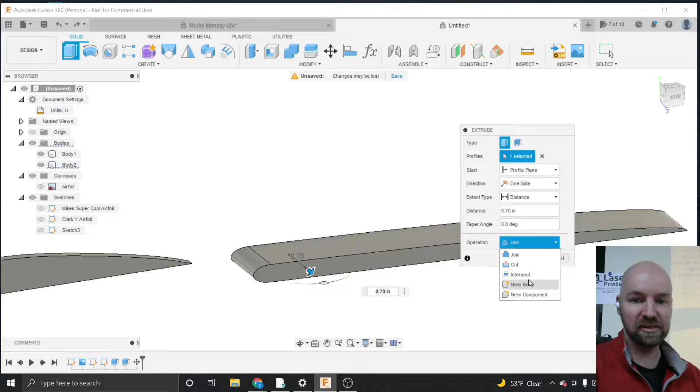If I choose this remove option, what it does is it puts another icon down here in my timeline. So sometimes you'll make a body and it's got some two-dimensional face on it, so then I choose to extrude something from this body—I'm extruding from the body here, not from the sketch. This might be a little over the top for some people, so I apologize. I'm going to make it a new body and say okay. Now this body, which I totally named body 3, was created based on body 2. So if I delete body 2 from the timeline, then Marty McFly's mother and father never got together at the Enchantment Under the Sea dance, and they never made Marty McFly. So if I delete this, you get Marty's ghosted hand. Oh no, it didn't do it, but you'll get things down here that appear red or yellow—it's like, hey, where's my dad? So instead of deleting, I would always say remove is a better option.